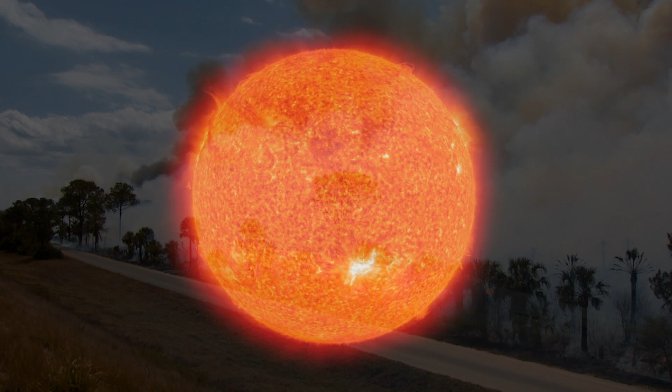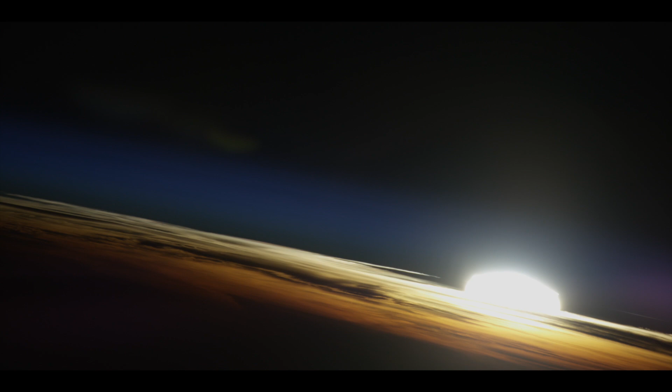The planet is warming. Now there is no room for doubt that the climate is changing and human activity is to blame. The main reason is the increase of carbon dioxide and other greenhouse gases that trap the radiation from the sun. Most of this is due to the use of fossil fuels.

Carbon trapped deep in the earth for millions of years as coal, oil or gas, burned for energy and releasing carbon dioxide. The world's fleet of commercial aircraft burn kerosene derived from oil. Estimates vary, but they probably contribute approximately 2 to 3% of global carbon dioxide emissions.

As the urgency of the problem of climate change increases, the world's aircraft manufacturers know that the commercial aviation sector must mitigate this contribution in the next few years and ultimately eliminate it altogether. Governments are waking up to the unfolding emergency. The United Nations is attempting to coordinate the global response in a series of climate change conferences.

More specifically, there are changes affecting the airline industry. Some Scandinavian countries have set ambitious targets for aviation. Most notably, Denmark has set a target for 100% fossil-free fuel for domestic flights by 2030. In 2022, EasyJet unveiled its roadmap to net zero, a plan based on emerging technologies in aircraft design and propulsion. This plan aims to bring its aircraft operation to net zero carbon emissions by 2050.

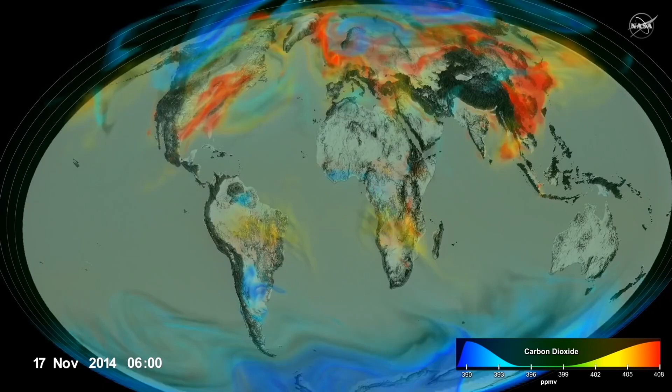In the UK, the government has created Jet Zero Council, a partnership between government and industry with the declared aim to deliver zero-emission transatlantic flight by 2050. How realistic are these ambitious targets? Does the technology exist to fulfill these dreams?

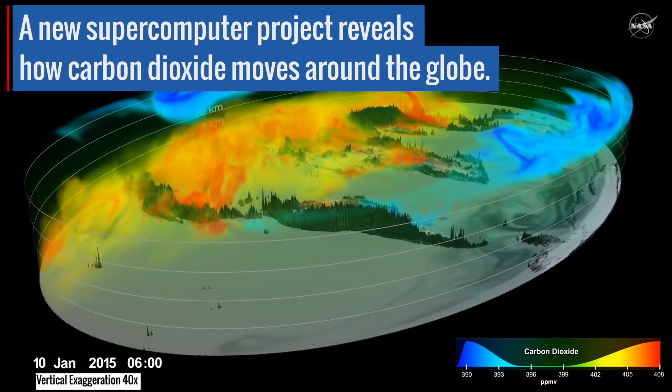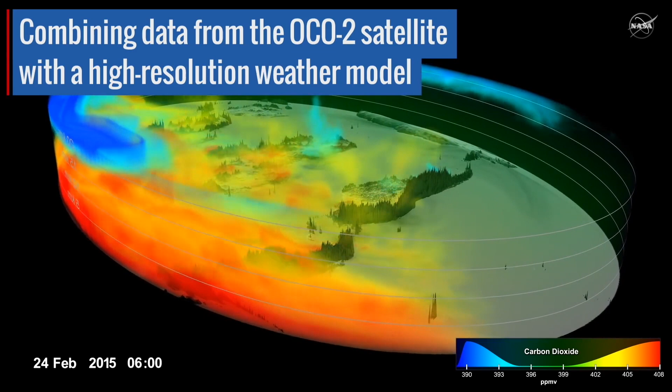In this program, we will look at the research and trials and talk to the people striving to deliver a sustainable airline industry. In addition to the big players like Airbus and Boeing, the need for the aviation sector to decarbonize has spawned hundreds of small companies and startups around the world with innovative ideas for green aviation.

Hi, my name is Neil Cloughley. I'm the CEO and founder of Faraday Aerospace. We're one of the new generation of sustainable aircraft manufacturing companies based here at Duxford in Cambridgeshire. So why are we here? Well, basically I spent many years in commercial aviation, selling, owning, leasing, managing aircraft in commercial aerospace with airlines, banks, etc. And aviation has always done very well at advancing and becoming better technology, cleaner and greener.

So if you remember back to the 1970s, we're looking at situations where you had plumes of black smoke out of the commercial aircraft. Don't see that today. So as an industry it's doing very well, but as we increase flying more, there is of course more that we can do, and that's the reason why we're here. We're basically looking at bringing new technologies to aviation to allow us to fly cleaner and greener, and basically allow you to fly as well.

So, why are Cranfield Aerospace doing what we're doing? Well, first of all, a little bit of history about Cranfield Aerospace and where we come from. So, we've been around for about 30 years, and during that time we've been doing a whole load of really interesting engineering development projects for the likes of Airbus, Boeing, Rolls-Royce, all those big aerospace companies that everyone knows. And we have been essentially designing and certifying complex modifications to aircraft for about 30 years.

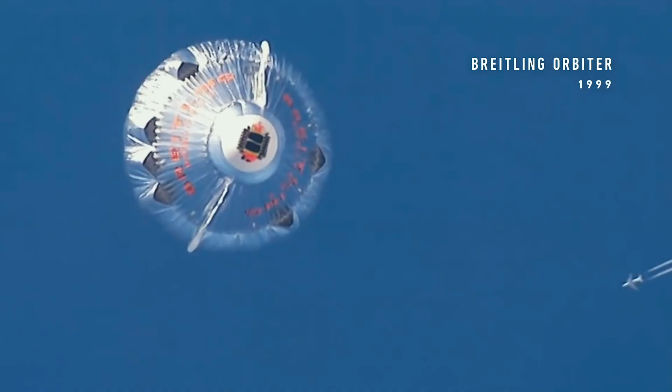A more recent spectacular achievement was by the Solar Impulse 2, an electric plane powered only by the sun. The solar panels were placed on the massive wings. The Solar Impulse 2 had a wingspan similar to the Airbus 380, which is the world's largest passenger airplane. In 2015, the Solar Impulse 2 flew round the world, over 42,000 kilometers at an average speed of 76 kilometers per hour. The journey took over 16 months in 17 stages and was fueled totally from solar power.

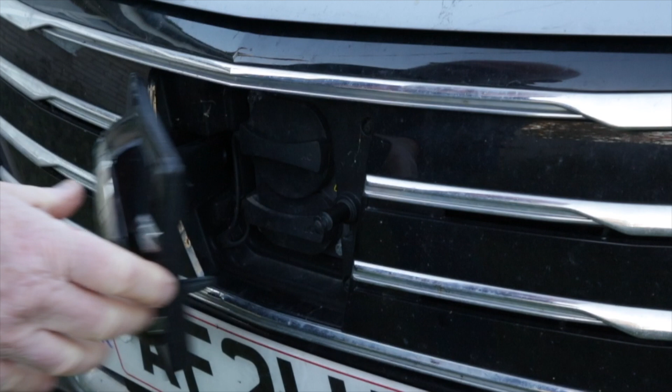With the recent advance of the climate agenda, electric cars powered by lithium-ion batteries have suddenly entered into the marketplace with some speed. Initially powered by Elon Musk's vision and his Tesla brand, it now seems that every few weeks another major car manufacturer is announcing a launch of their new all-electric fleet, with the result that prices are falling. These all-electric cars are becoming serious contenders in this crowded marketplace. There has been much progress in adapting this technology to aviation.

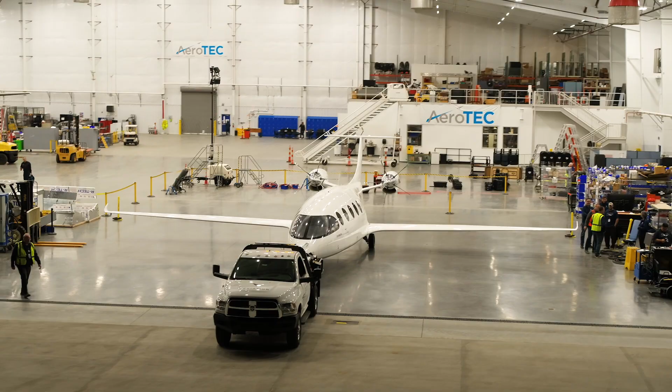In October 2022, a fully electric passenger plane built by an Israeli company, Eviation, took off from Grant County International Airport in Washington State and flew at 3,500 feet for 8 minutes. The flight was a proof of concept of a commercially viable all-electric plane. The plane, named Alice, is designed to fly up to 250 miles at 10,000 feet with a cruising speed of 276 miles per hour on a single charge, and the battery can be fully recharged in 2 to 3 hours.

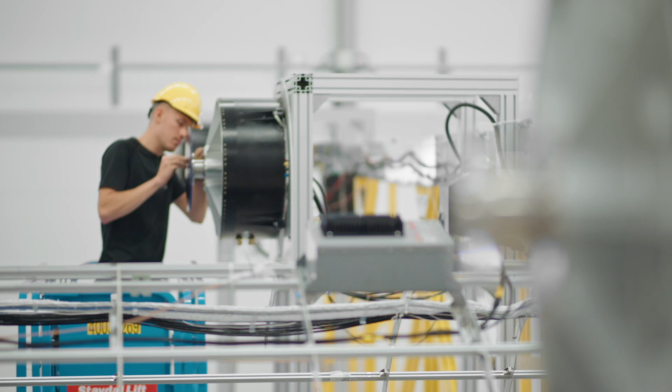There are now several companies across the world competing to bring battery-powered electric planes to the short-haul sector. One example is Heart Aerospace, a company based in Gothenburg, Sweden. They are developing the ES-30, a battery-powered electric plane designed to carry up to 30 passengers up to 200 kilometers. The plane carries reserve hybrid turbogenerators which can also be used to extend its range. The company hopes to bring this airplane into commercial service before the end of the decade.

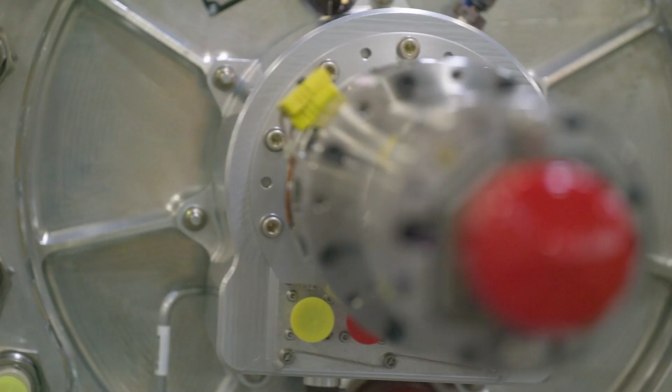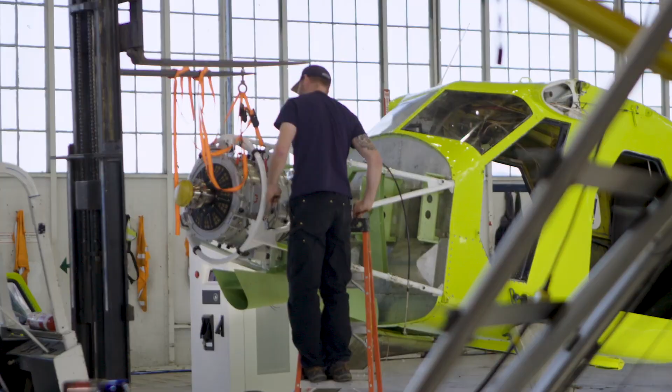Another company, Seattle-based magniX, have taken a different approach. They have designed the electric motor that powers Alice. These motors are designed to be easily installed in existing small planes to replace the conventional engine. This would allow operators like Vancouver-based Harbour Air, which is Canada's largest seaplane operator, to refit their entire fleet instead of having to replace all the aircraft.

When it comes to attempts to scale up this technology in the aviation sector, however, there is a major stumbling block: the weight. Omer Bar-Yohay, the CEO of Eviation, has described the all-electric plane, Alice, as a huge battery with some plane painted on. Batteries that store the amounts of energy required to fly are heavy, extremely heavy. This is a minor problem with automobiles where energy is required for forward propulsion only, but a major problem for aviation where most of the energy is required to maintain lift.

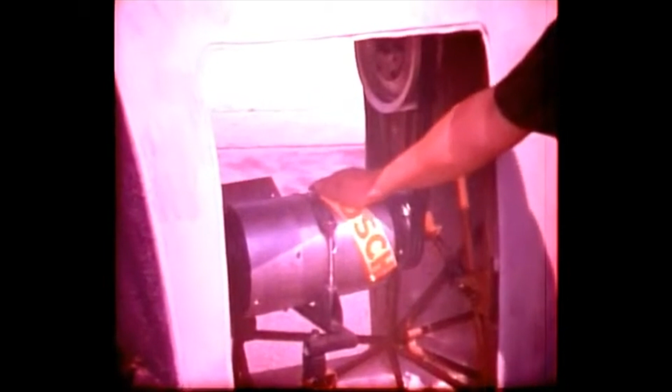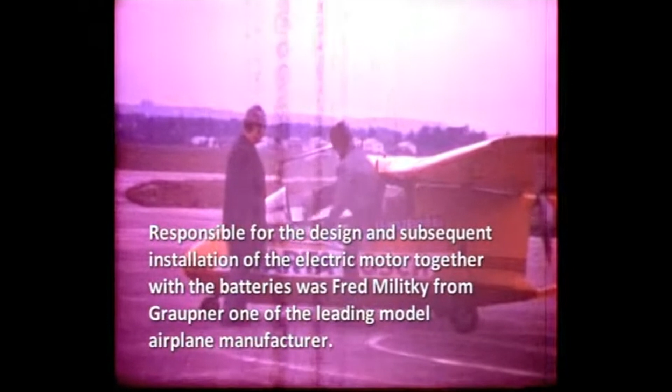First of all, we looked at batteries because there was a natural zero emissions solution. It works in cars. So we had a look at batteries, but actually it didn't take us very long of doing calculations to figure out that, because of the really low energy density of batteries, they have a tenth of the energy of kerosene in the same weight of fuel. That was never going to work for aerospace. Nothing but the smallest aircraft will benefit from the use of batteries because they just can't get enough juice out of them. So a conversion of a Britten or an Islander using batteries alone would get about 20 minutes of flight, and that's just not enough for credible operations.

So we looked at hybrid electric, which is a conventional engine with batteries, because then you get the range. But unfortunately, because of all the redundancy that you need for safety, it means you're having two batteries, two engines, and you end up carrying so much weight around with you that actually your reduction in carbon emissions, if you get any, are no better than just developing a more efficient engine. And we didn't really see the point in putting a lot of money into that. The difference lies in the way that batteries and jet fuel store energy.

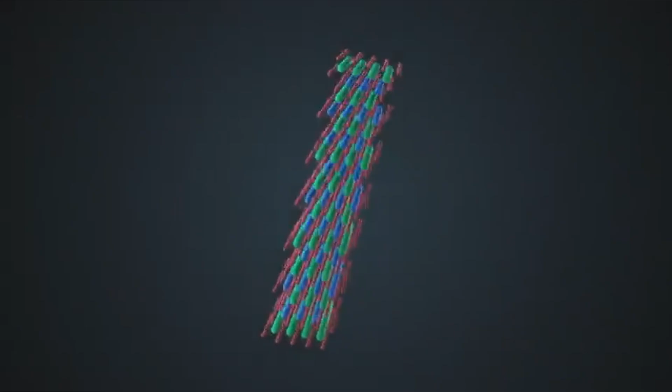Batteries store energy electrically, but jet fuel stores energy as chemical bonds between the atoms that make up the fuel. During its combustion, these bonds are broken, releasing massive amounts of energy stored in them. This difference means that a kilogram of jet fuel stores more than 80 times the energy that can be stored in a kilogram of lithium-ion battery.

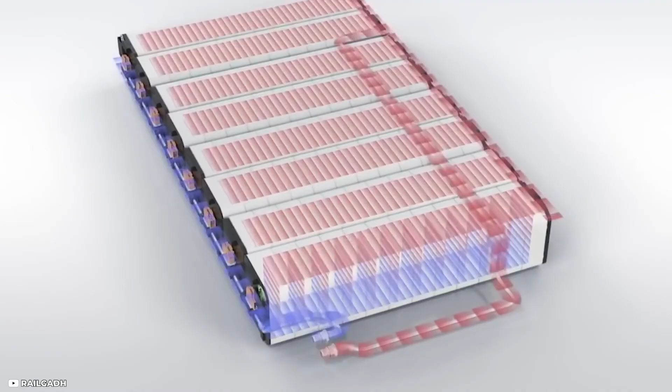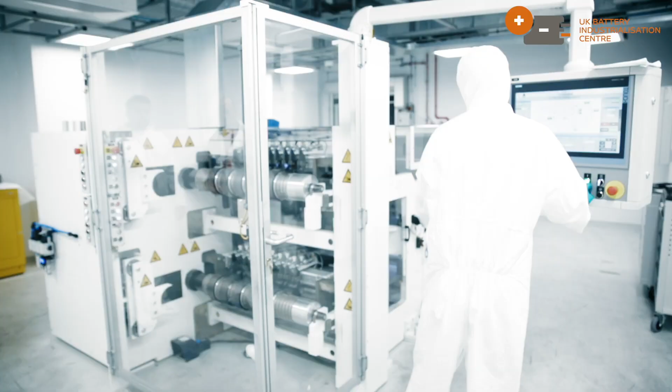It is this difference in energy holding density that means that the use of battery-powered electric planes is going to be limited. The search for new battery technology has been frustratingly slow. The most promising studies are into lithium-sulfur and metal air batteries, which use the air as one of the terminals. In theory, a lithium air battery could achieve near the energy density of jet fuel, but progress is frustratingly slow.

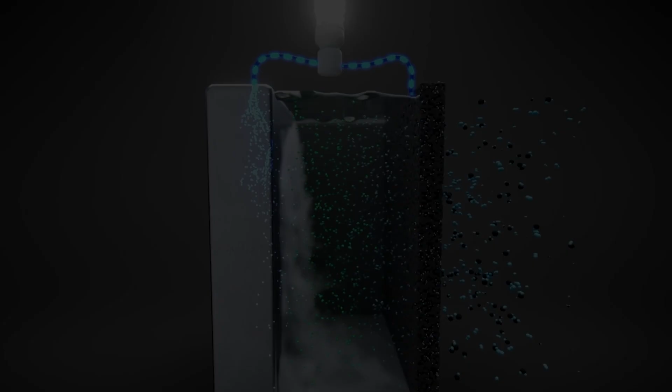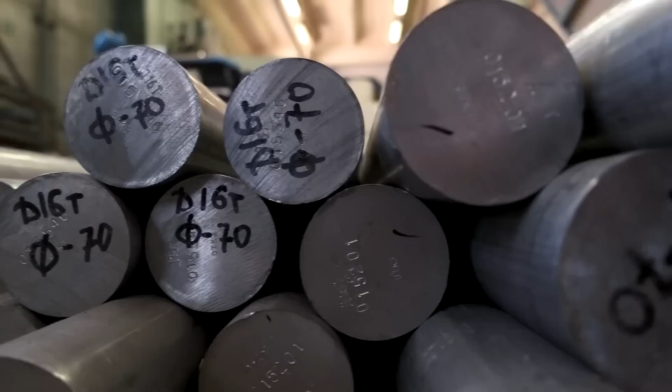There has been a working prototype of an aluminium air battery, but it is not rechargeable as the aluminium component is destroyed during discharge. However, with the potential rewards awaiting, huge amounts of research are being conducted in this area.

One way to deal with this problem is to revive an old technology, the airship. This uses the natural buoyancy of a lighter-than-air gas, like heated air or helium, to create the lift without having to use the aircraft's power, so the battery weight becomes irrelevant.

Hybrid airships, however, have limitations. They are slow, traveling at about the same speed as normal road traffic. Crossing the Atlantic would take days. They are also much more weather dependent and very expensive to build and maintain. They are most likely to find a use in shipping cargo.

Airlander is the world's most efficient large aircraft. It's designed to deliver 10 tons of freight, 100 passengers, and to deliver them to places, or take them to places, at only 10% the emissions of other aircraft.

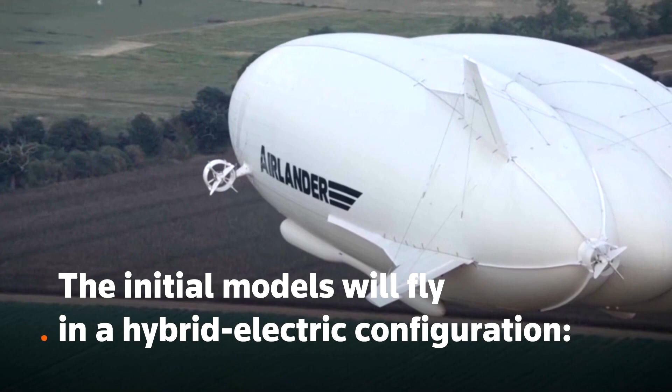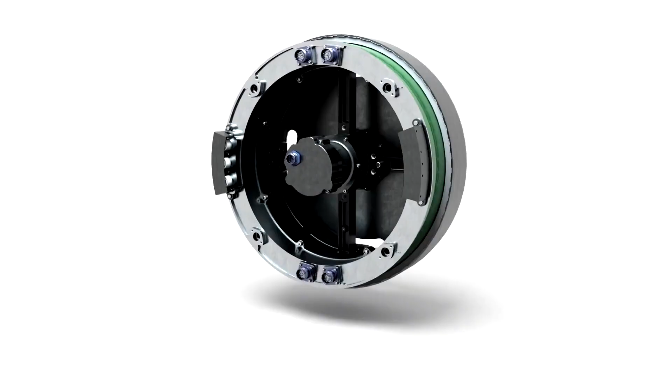What we do with Airlander is combine some of those technologies that were in airships of the past, but we put that together with a lifting wing. We use modern materials and modern technologies to give us an aeroplane that's super efficient, but still takes off and lands from the ground like other aeroplanes. Different to airships, which of course float.

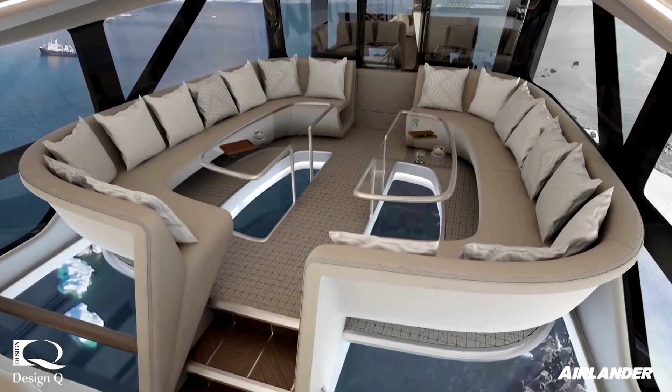The experience is totally different for a passenger. We think of Airlander as much as a fast ferry, because it's big, it's spacious, every seat is accessible to the aisle, you can move around. Big windows, flying much lower, it's very gentle, so none of that vibration and turbulence that we're used to in other aircraft.

The inherent weight problems with battery-powered aircraft have led other researchers to look into alternative ways of powering electric planes. Electric planes are eminently suitable for the short-haul industry, journeys limited to about 250 miles and a small number of passengers. They will be effectively Airbuses or Airvans for freight.

However, since nearly half of global flights are less than 500 miles and 80% of commercial flights are short-haul, less than 3 hours of flying time, these electric planes could make a huge contribution to a reduction in the carbon emissions of the world aviation industry.

This is the sector of commercial aviation that is likely to see the most significant reduction in carbon footprint in the next few years. In large countries like the United States, domestic flights are an integral and important part of their transport infrastructure. Faradair, based at the historic Duxford Airfield, is looking to use an electrical generator powered by sustainable aviation fuel.

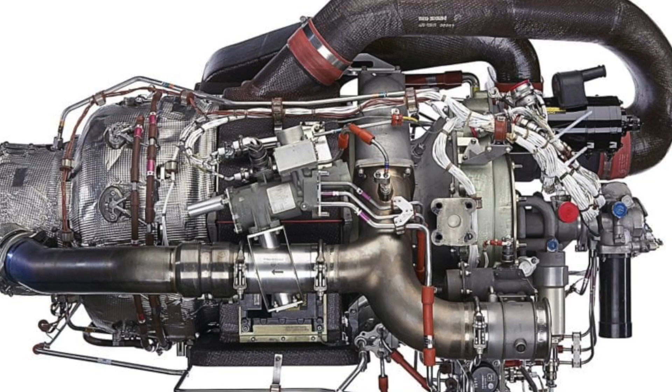There are new technologies, electric motors. We've seen cars, 2.5 tons of machinery accelerating faster than supercars. If you'd said that a four-door saloon would out-accelerate a Lamborghini 10 years ago, you probably would have been laughed out of the room. It's a common occurrence now. Everybody can do it.

But the great thing is that technology, that single motor, single piece in that electric motor with no other moving parts, is a real great piece of technology innovation. It means that we can use it for a long period of time without having to maintain it, without having to repair it. That's fabulous. But whilst electric motors are fantastic and they give us this great opportunity, the big question comes with how do you power it? That's the core crux.

We've seen with battery technology today that's quite limited. It's quite heavy. It doesn't quite have the power density that we need at the moment, but it is getting better. But it also has some nasty habits as well. There's the occasion of thermal management where it does like to have a party on its own sometimes and create a fire.

So you have to manage that process as well. So these technologies will improve. Likewise, hydrogen fuel cells, ammonia fuel cells. All of these new clean technologies are currently being worked on and they will be implemented. Of that there is no doubt. The question is over what time frame.

With our aircraft, we decided that we would try and use that same principle that has allowed the 787 and the A350 to do the routes that the A380 and the 747 big airliners used to do with just 2 engines. We want to do the same with regional flight, where we take 2 turboprop engines and instead we use just 1 turbine, effectively a box of power if you like. It's a power source. In that we'll use jet fuel.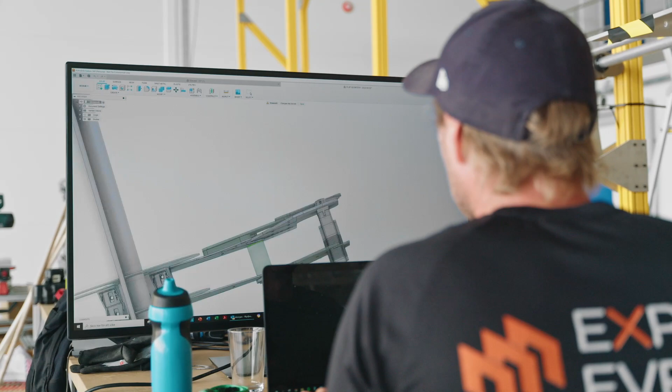So with our aircraft, the BEHA, a lot of people look at it and they say, wow, it's got 3 wings. Is that the Red Baron's plane? In fact, I was on a US breakfast show talking about the old Fokker triplane. The amazing thing was the triplane was actually created by Thomas Sopwith. It was a British invention first, which the Germans then evolutionized into a very efficient aeroplane, to the point that if you went up against a Fokker triplane in World War I, you were in real trouble. It was a very effective aircraft.

So when we first brought this project to the fore, a lot of people are like, 3 wings, oh, very draggy, why do you want to do that, and all the reasons that they put forward. It's 100 years ago we gave up all of that. But actually, when they did the studies, when it was actually tested and looked at against 6 different wing configurations that were proposed by others as a comparison, this wing configuration came out the best.

But you will always get the naysayer. It is something that we will always battle because everybody has an opinion, but not necessarily everybody has all the facts that back up the information of why you're going down a path.

Modern computer technology also means that novel ideas can be tested much more quickly. What we've seen through history is the fact that technology now offers us an amazing opportunity to do things in a much shorter time frame. Imagine a Formula One team goes to a race one weekend and they see something appear on a car. They think, wow, into the computer, into the engineer's hands. Within 2-3 weeks later, they have something similar on their system.

Do we have to have that wing and tube shape? Could we be flying a blended wing across the Atlantic? This big, great big flying wing. Could we be flying something that's much faster? The shape is much more fuel efficient. Who knows? But computers and processing power allow us to look at all these options much quicker now.

Neil's vision for the short-haul sector goes beyond his new airplane.

He believes it could bring in a new regional air transport network which could radically alter the way we travel. Ask yourself, where am I going to fly this aeroplane? What's it going to do? Well, of course, we're not going to have you go across the Atlantic on an aircraft that flies at about 200, 250 knots. It's designed for the movement of people, boxes, cargo, equipment. So therefore, it's effectively the flying van.

What it means is that you've got intercity regional connectivity. We started talking about regional air transport back in 2014 when we formed the company. Today, that's evolved. There are studies now from the likes of McKinsey, NASA, various bodies talking about regional air mobility. Now, regional air mobility is basically the ability for you to fly between cities like you would be taking a bus. And that's what we're trying to do.

We're trying to bring you that environment where you can see your regional airfields as a valid part of your transportation options. Now, if you look at land transport today, you're tied to the train, you're tied to the car, you're tied to a coach. We're here at Duxford in Cambridgeshire. A lot of our R&D for our aircraft is being done in Swansea in Wales.

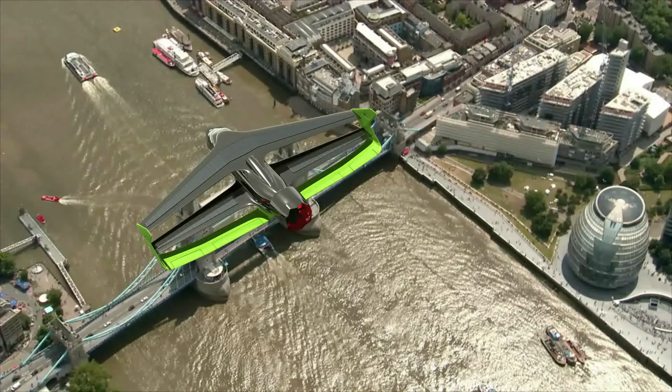Anybody that's done a journey from Cambridgeshire to that far west in Wales knows that that is a 5 to 6 hour journey process. Wouldn't it be great if we could do that a lot quicker via an aircraft that was affordable, that you can just use like you would an ordinary part of your daily transport? That is what we're doing here with the BEHA.

Small zero-emissions aircraft coming into service is far more than that technology step required to scale up the rest of the industry. It's in itself a huge market opportunity and actually a way of redefining regional connectivity. So back when these aircraft were first invented and first came to market in the sort of 60s, the demand for sub-regional transport was huge. Over the years, however, that sector of the market has been significantly underinvested in, and the reason for that is because of the economics of kerosene. It's quite difficult to make small aircraft operations profitable.

So as larger airframes came on board, airlines tended to move from the really short hops to the longer journeys and the larger aircraft, because then the cost per seat, per passenger, goes down and you can make more profit. So the whole theme of this industry has been to go to ever larger aircraft until it culminated in the A380, and then everyone realised, well, we got a bit too far there and started coming back down again. But that's essentially what's happened, which means the sub-regional markets, these 9 to 19 seat aircraft, have not had any investment in them for some time because of the economics of kerosene.

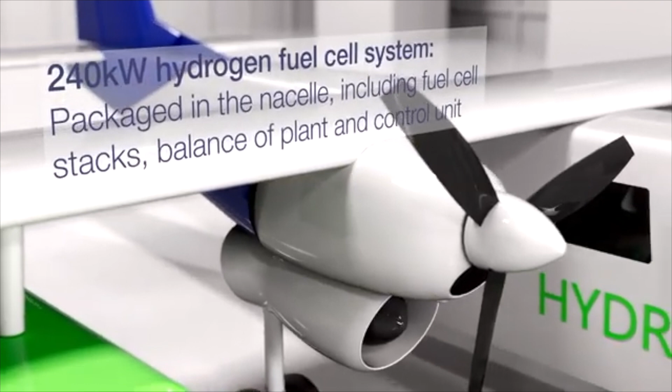So in terms of how does a hydrogen fuel cell work, or how does hydrogen propulsion work? Well, effectively, our energy is stored as hydrogen in gaseous form in underwing tanks in our aircraft in its product configuration. And we need to convert that gaseous hydrogen and the potential stored chemical energy in that hydrogen into propulsive energy for the aeroplane. So we take the gaseous hydrogen from our fuel tanks and feed that gaseous hydrogen into our hydrogen fuel cells themselves.

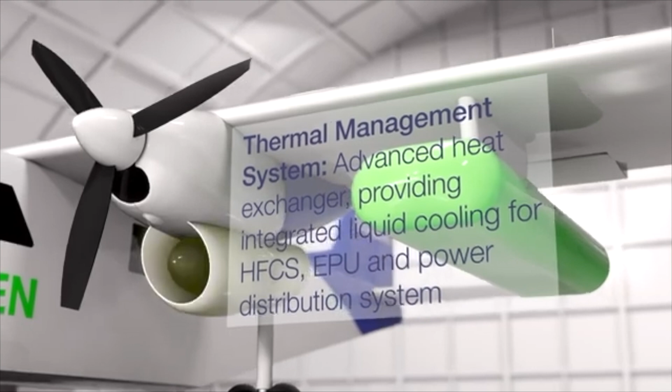And the hydrogen fuel cells are where the electrochemical process takes place to take that hydrogen in, plus the oxygen in the atmosphere, we take that in as well, and they combine in an electrochemical process to create energy, electrical energy, waste heat, and our own exhaust, which is effectively water vapour.

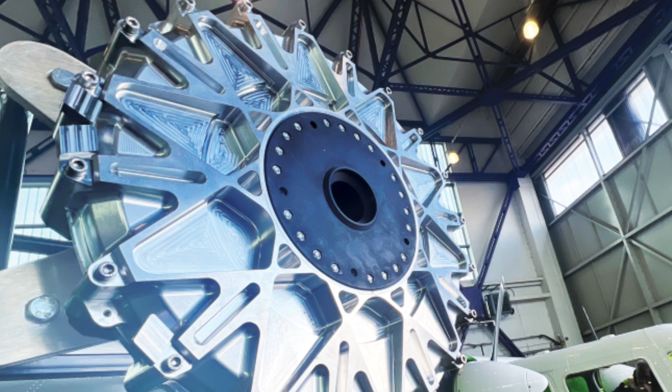We take the electrical energy that's output by the hydrogen fuel cell itself, and we use that as motive power to drive an electric propulsion unit or electric motor, and we have an advanced electric motor for Project Fresson. And that electric motor is very compact, very high efficiency, and that drives our conventional propeller to provide thrust for the aeroplane.

Because of the urgency of the climate emergency, Cranfield is planning to fit their new system into existing proven and certified airframes. This should enable these aircraft to be certified for commercial flight much faster than designing a completely novel airplane. So what are we doing?

We are converting a little aircraft called the Britten-Norman Islander. Now this is an aircraft that's actually built in the UK. It's the last remaining whole aircraft to be built in the UK, and it's an absolutely cracking little aircraft. The reason why we chose it is because it's small, which is where the technology is at the moment, and also because although it can actually fly 1,200 kilometres, the vast majority of its operations are actually short hops.

So in the UK, for example, you'll find them flying around in Orkney and also between Land's End and the Scilly Isles. And it's those sorts of operations that the Islander is really good at. It can land on grass, ice, beach, anything that looks remotely like a runway, your Islander can land there. It's an aircraft that's loved around the world, and it's very robust. It's also quite a simple aircraft, and so to modify it is easier than modifying something that's more complicated. So we chose the Islander to put in our hydrogen propulsion system.

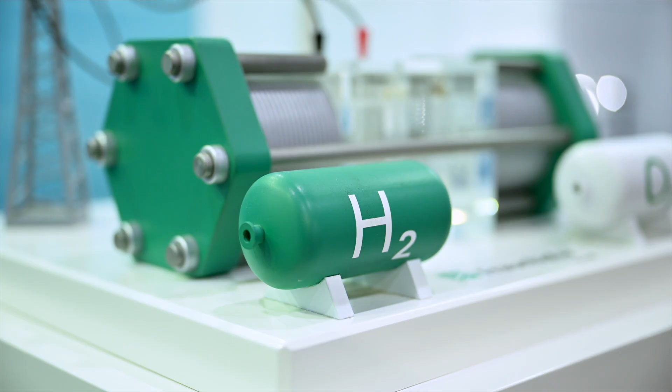So high pressure and heavy, or not as heavy, but cryogenically cooled. Both have their challenges, but we only really need liquid hydrogen when you want to get that extra range, and once you start getting into aircraft of probably about 15 seats and above, you start needing that liquid hydrogen, because otherwise the gaseous tanks are just starting to get too heavy from the amount of fuel you need to carry. So phase two is getting into a conversion of another aircraft and going liquid at that stage to get more range and more people in.

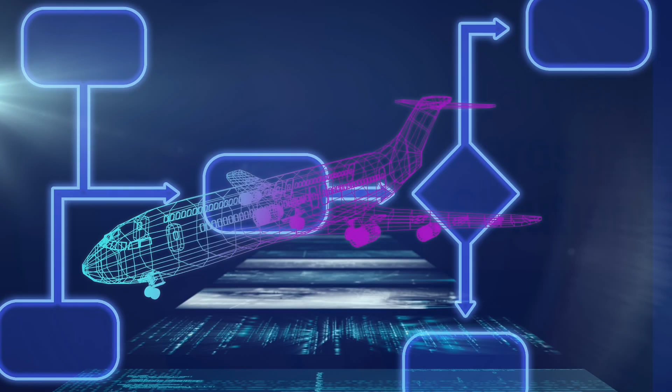Phase three is where we really start to live our dream, because our ambition is to be a designer and manufacturer of clean sheet, zero and low carbon emissions aircraft. So phase three is about our new aircraft that will be designed around the hydrogen propulsion system. Because the thing with hydrogen propulsion is, it's not like an engine you can just stick on a wing. It is really quite integrated into the airframe design, and it has quite a lot of implications for airframe design.

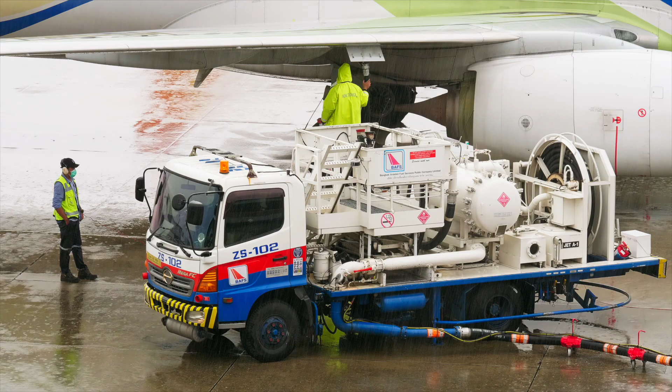So for example, in your normal aircraft these days, kerosene is actually kept inside the wings. But when you're cryogenically cooling the fuel, you can't really do that. So you can't put liquid hydrogen in the wings of an aircraft. So it would need to go either in the fuselage or in an underbelly or over fuselage pod, which obviously in itself has an impact on that airframe design. But then you've also got wings that aren't heavy with fuel, so they have to be designed differently, but they can also be designed in a more efficient way to help with the aircraft performance. So hydrogen propulsion essentially has a massive impact on airframe design.

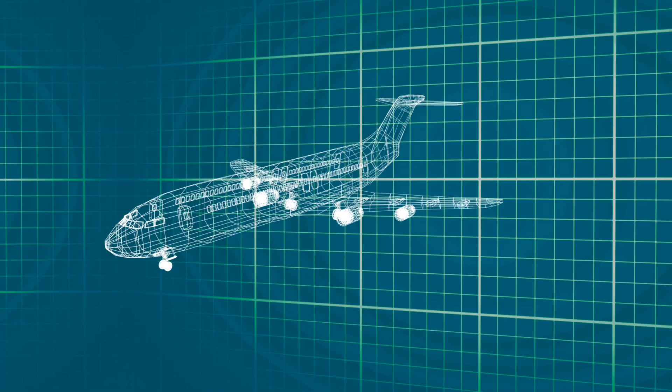So in order for it to be as efficient as possible, and let's face it, we all need to focus on using as little fuel as possible, not just new fuel, you need to be having the airframe and the propulsion system working together to create that optimised aircraft, which is what we want to do in phase three. And that would be an aircraft between 20 and 50 seats, depending on what the market needs. The final phase, which we'll get to probably when I'm retired, is a larger regional aircraft of up to about 100 seats, using the same sort of technology.

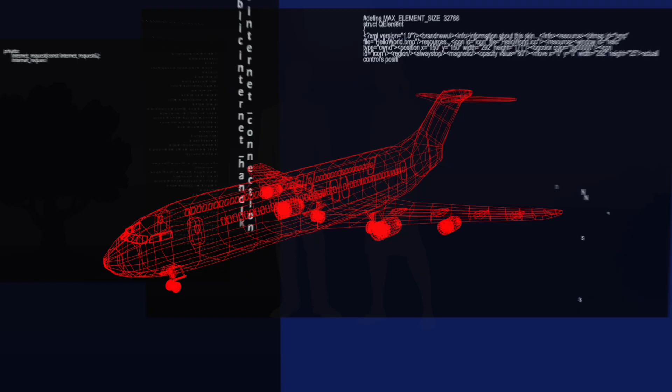There are many other projects developing along similar lines all over the world. One of the major hurdles to this type of research and development is getting the funding. This is big engineering, and the equipment does not come cheap. So Faradair has been going for 8 years now. If somebody had taken me to one side at the beginning of this journey and said, this is what you're going to face being a startup, this is what your life is going to be like, I can tell you now, you would give it second thought.

It is hard, it is really hard, and that is the story of every startup company. What you're trying to do is you're trying to push boundaries, you're trying to push innovation, you're trying to pioneer new things. There's a certain amount of risk in that. Now the problem with that is somebody has to pay. Now if you look at America, there is a culture where there's 20 reasons why you can do something and 5 people prepared to fund the operation to do it.

Here in the UK, you'll find that there are sometimes 20 reasons why you can't do something, and other people will come up with reasons why you shouldn't be doing it. Well, we've had to fight through that, as have many companies. There's people like ZeroAvia who've moved to America. We ourselves almost moved to America in 2019 because the funding system that we have here in the UK is

very risk averse. We can go through a system of choice, which is if I make no decision, it can't be the wrong decision. We can give money to a huge major corporation because it's industry, so how can that be wrong? That must be safe. Or we can give money to these small companies, these SMEs, these innovators, these pioneers. But there's more risk to that. Do I want that risk associated with me, which ends up pushing us back into option 1 and 2, which is do nothing or give money to big corporations?

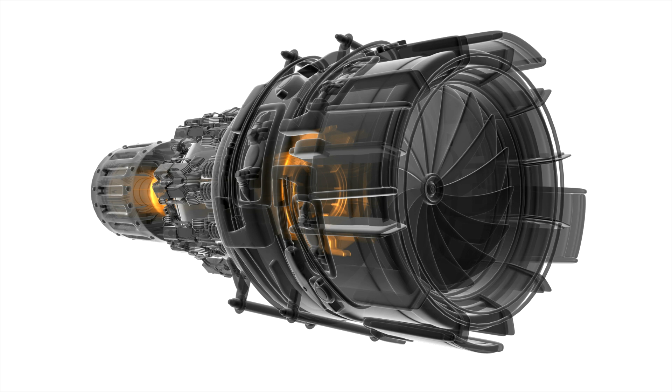Propeller-driven aircraft can also not fly as high. As altitude increases, the air becomes thinner, which reduces the thrust that props can generate. These aircraft typically fly at about 25,000 feet. Jets will typically fly at 35,000 to 40,000 feet. At these altitudes, air is only 20% of its density at sea level, and a propeller cannot deliver enough thrust. A jet engine has no such problem. The reduced air density means that there is much less drag on the plane, and so it uses fuel much more efficiently. It is unlikely that the jet engine can be replaced for the long-haul sector in the foreseeable future.

In the next program, we will be looking at how the long-haul sector can get towards zero emissions by using sustainable aviation fuel, increasing the efficiency of the engines, and eventually moving to the ultimate goal of using hydrogen to power a new generation of jet engines.